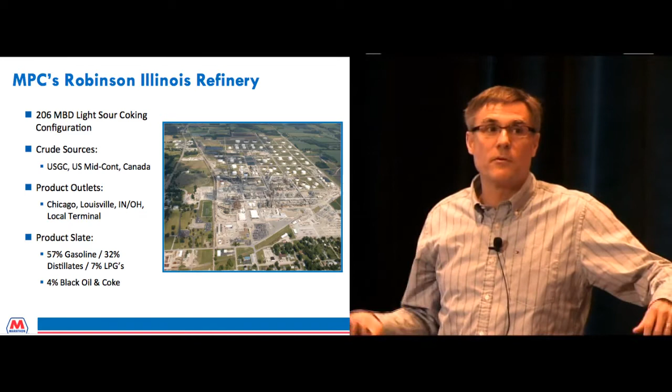And I guess one of the questions I always get is why is the refinery located in Robinson, Illinois? And I can tell you back in 1906 through 1908, it was the world's largest oil producing area. And that's why the refinery's there. So the refinery is 107 years old.

So we have a very strong commitment to safety at the Robinson refinery, and everybody has the right and responsibility to go home uninjured. We've been a VPP star facility since May of 1999, and 7 of our embedded contractors have VPP status. We also have an outstanding behavioral-based safety program that is all employee-led, and we are certified by the Cambridge Center for Behavioral Studies. So again, a very, very long record of good safety and environmental performance.

So then we go to our basis for action. We did experience a toxic gas exposure in early 2007. It was while a lone operator was neutralizing sulfidic caustic and was overcome by hydrogen sulfide gas. And I can tell you, I transferred to the refinery a couple months after this incident, and it had a significant impact on all the employees that work there.

At the time, the division manager that was there was very forward-thinking. His name was John Swearingen. Today, he's vice president of safety, environmental, health, and security for Marathon Petroleum. But he really wanted to come up with a man-down system after this incident, and really wanted to help those that were unable to help themselves. Obviously, in any type of toxic gas exposure or any other exposure, time is of the essence in getting help to an individual. And so we embarked on this process to address these points.

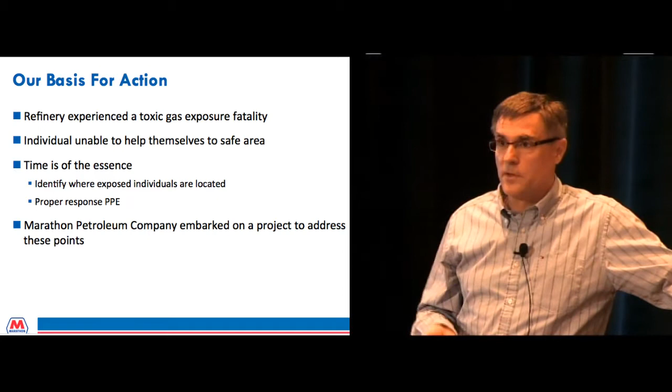At the time, the operations manager at the refinery was Kevin Bogart. And he went into a role over the 6-plant system, where he really led strategic projects. And so he, along with John, we ended up partnering with Accenture as a system integrator for this life safety solution. And we worked with them closely to really develop the solution that I'm going to talk about here.

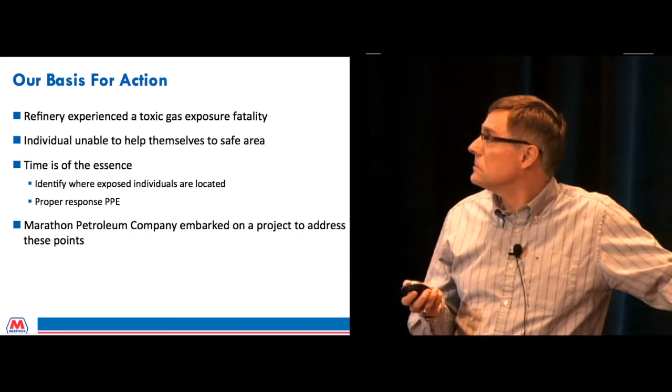So if you look at gas detection history, before we went to the life safety solution, everybody wore a single gas H2S monitor. Again, very common in the refining industry. And gas bumping and calibration, we required that on a monthly basis, so not very frequent. And there's no way to reconcile the data to a monitor, so it was difficult to understand who had that monitor, and it really relied on self-reporting of exposure incidents.

Now I will tell you, as we implemented the life safety solution, you would expect the number of exposures to go way up. They did go up, but not as significantly as we thought. So I don't think we were under-reporting as much as we thought, which is a good thing.

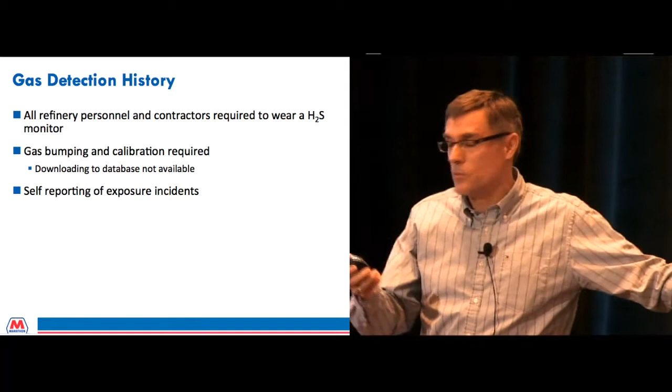So then, to close the gaps we wanted automatic bump testing and calibration of the monitors. We wanted to understand who is associated with each monitor. We did want, again, 100% reporting. And we wanted real-time data into a central control room operator that could help provide response. And they wanted the location of the personnel to be known.

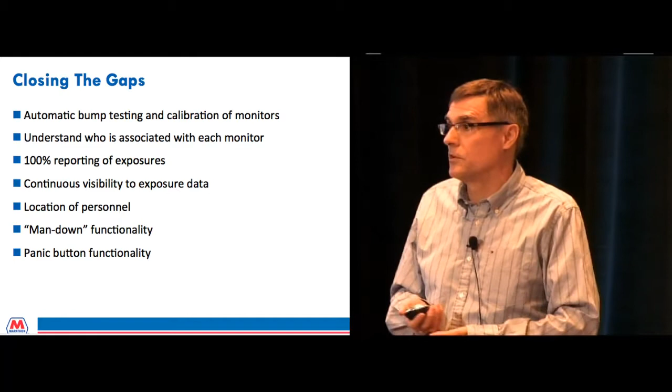And then obviously a man-down functionality. So if somebody went down with a heart attack, it might not be a toxic gas exposure, we wanted to get those individuals help. And then a panic button functionality if somebody was in a difficult situation. Again, those are the gaps we wanted to close. So then we came up with the life safety solution.

So in deploying this, again, I mentioned we're the first to install the life safety solution, and it is across all our process units and tank farm facilities, and it also includes coverage for a remote facility where we obtain our process water near the Wabash River. And so what is it? So what we did is we installed the Wi-Fi coverage across the refinery.

It isn't a mesh network, so some of the APs are just powered, some are powered and connected to a switch. And I will say the important thing to understand here is coverage-based, okay? It is location, so it's location-based. And then the other thing that's important too is there's no dead zones in it, right? So really important to understand that. So again, let me go back and add. I just want to make sure I'm clear on this. It is location-based, so again, it gives location of the individual versus just installing access points throughout a unit that just gives you Wi-Fi coverage.

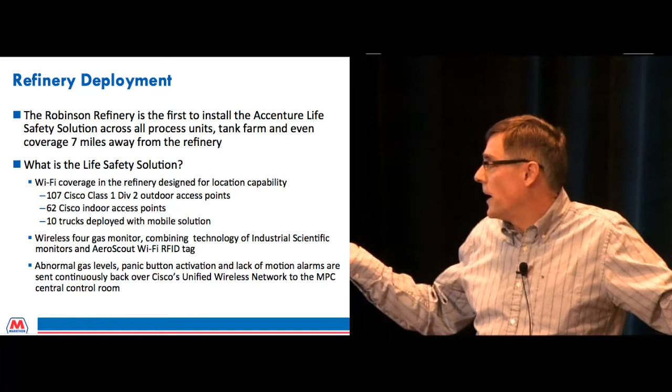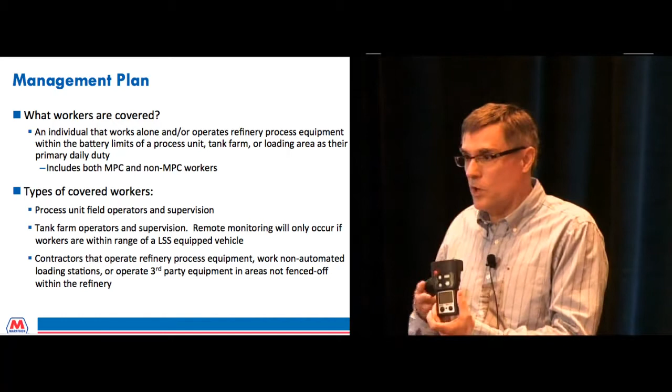So we had to define what workers are covered. Right now we cover all the operating employees, and we came up with that just because they're lone workers. They work alone, so they'll be out making an operator round alone. As of today we have not covered maintenance, and the reason is they tend to work in pairs, so they don't work alone. And roughly 240 operators are covered with the system at the Robinson Refinery. And what's really nice about it is we can pool these devices. So we didn't have to buy 240 of these. We ended up pooling them, and so there's some economics that we benefited from there.

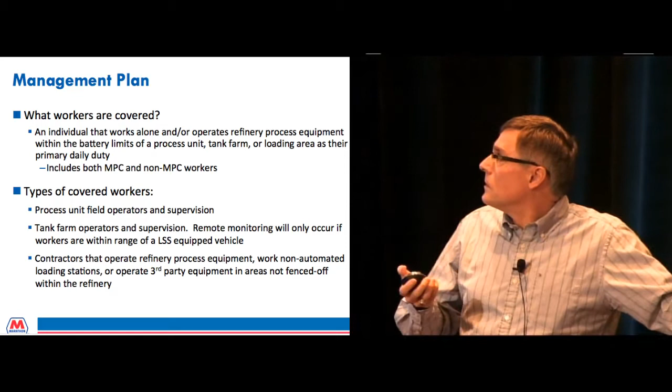So the work processes are really pretty simple. We have a pool of monitors in each operating shelter. At the refinery, there's 7 operating complexes plus the tank farm, so 8. And so we have a pool of monitors in each operator shelter. And so what happens is the night shift comes in. They'll take the day shift monitors that were just released. They'll put them in the docking stations, calibrate, bump test them, put them in the charger, and then the day shift will pick the ones that the night shift had done the same to and charge. So it works really well for us.

But the key thing that I really like here is there was a lot of debate about where this real-time data should go. And there were some proponents. Again, I want to make this really clear. This project was driven by the operations department. The operating organization at the refinery drove this. So safety didn't drive it, and IT didn't drive this. But we did have some input from them. Obviously, we needed support. But one of the things that came up, safety wanted to have our security group monitor these alarms coming in. Well, they have no clue. There's no training. They don't understand what the alarms mean. And so what we ended up doing is at each operator console, we have 7.

We have a central control room with 7 operating boards. And each operating board has a monitor where they're monitoring the people in their process unit. And the reason that's so good is those operators, the console operators, are trained in all the outside jobs, so they know all the hazards. They understand when somebody does get exposed, what tasks they were doing, and then also they understand what type of response to come back with.

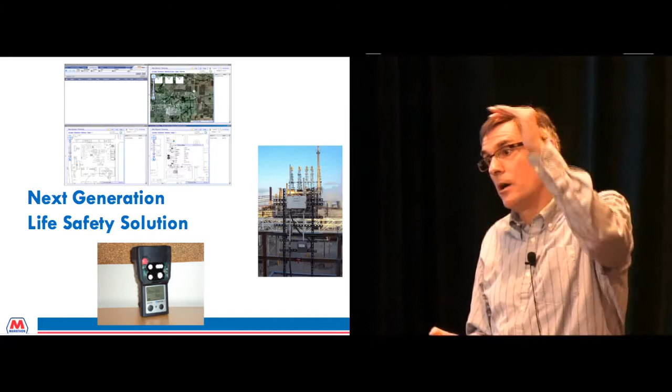So if I go back in the presentation here, to this screen up in the upper left-hand corner. That stays steady, it doesn't move, but that's really the alarms that come in there. And so what happens if there's an alarm on H2S, it comes in, it lets the operator know who the individual is that has the monitor, and then it also gives the current reading, so what gas level, so they can see, is the gas level going up, is it going down, or more than one operator exposed, that type of thing. And again, what's nice here is the operators help design this.

So the console operators actually help design how this looks. They do have to silence the alarm here, and so they can silence the alarm when it comes in, but it doesn't automatically roll off like the DCS alarms do. It stays there, and so then they have to make the proper response out in the field, and then after everything's clear, they can clear that alarm on there.

What's really nice, though, is the plot areas. They have some ability to move those plots around so they can look at one process unit if there's a lot of maintenance or a lot of activity going on in there, such as a turnaround, or they can expand it and they could look at their entire complex that might have 3 or 4 process units in it. So they give some variability for the operator what they want to look at.

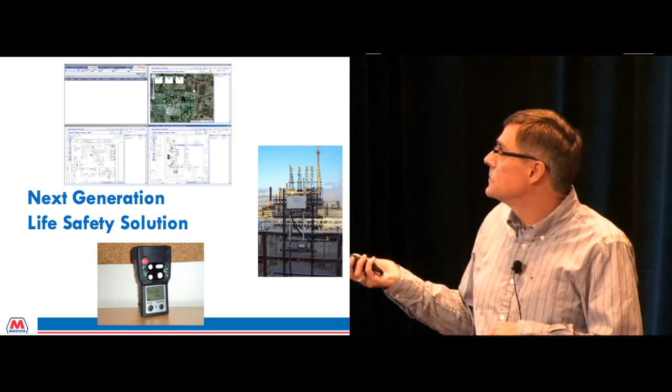And at any time they can click on one of these characters here, who's really the individual in the unit, and they see the real-time data that's coming in on that individual. So again, data is transmitted every 5 seconds. Okay.

So the other thing that's really nice about this too is to ensure this 100% reporting. So the alarm comes into the central control room operator, but also the system generates an email. The email ends up going to the chief operator who's on shift. It goes to the day foreman who also gets that. And then the chief operator on shift is responsible for entering that in our knowledge management system. And that's where we track all our incidents, HAZOP recommendations, so it's just a large database.

And then I come into work the next business day, and I automatically know if there's been any exposures. And then I can make sure that we get the proper investigation. So usually, if it's an exposure over 10 ppm, and that's our action level, we'll do a Category 1 incident, we'll have the day foreman investigate it, and if it's over 50 ppm, then we'll put a TapRooT incident investigation team together. So just to give you a feel how we handle those.

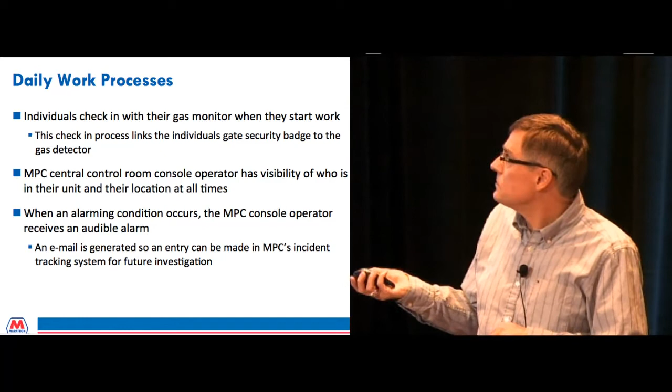H2S alarms alarm instantly, so there's no delay in coming in, and so we get those right away. But on the LEL, it is set for 10%, and it does have a 15-second delay. Because what we noticed is there were times when they were disconnecting a sample bomb, it would alarm for 3 seconds, and there were nuisance alarms coming into the console operator. So we put that 15-second delay in there to say, hey, is it really a significant event? And so if the LEL falls back, then there's no alarm generated to the console. And the same goes for the O2 alarms. They're handled the same as the LEL.

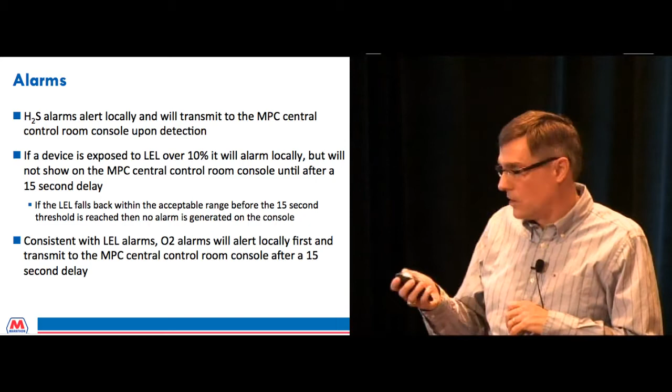And then one of the things that we're still working through, I did mention it's a 4-gas monitor. We do have a CO boiler at the refinery, and so we would like the functionality of CO, but right now there's hydrogen interference issues. It's an issue that Industrial Scientific is working through. And this is also big for them, I understand, in the steel industry, so for blast furnaces and things, they have to resolve this.

And then for the motion aspects, what we do is lack of motion. We set it 2 minutes, and so if somebody doesn't move for 2 minutes, then it'll alarm, and they have 30 seconds to acknowledge that. We had it set for a much shorter time period, and we found that that wasn't a good thing.

We were generating a lot of alarms. So we wanted to balance if somebody really went down and needed help versus a lot of nuisance alarms. And we ended up on this 2 minutes, and it's worked very well for us. And so then they have 30 seconds to locally acknowledge it by shaking the monitor. And if they do that, then it clears and it won't go into the central control room.

And the comfort stations, one of the other things we came across is it's wintertime, they put it on their jacket, they go in the comfort station, they hang up their jacket, and the next thing you know, it's alarming. So we put exciters in at the entry points into the blast buildings, and so when the operators go in their blast buildings or operator shelters, it turns off the motion and then turns it back on when they go out. But all the other readings are still active. And again, the panic button transmits immediately into the central control room.

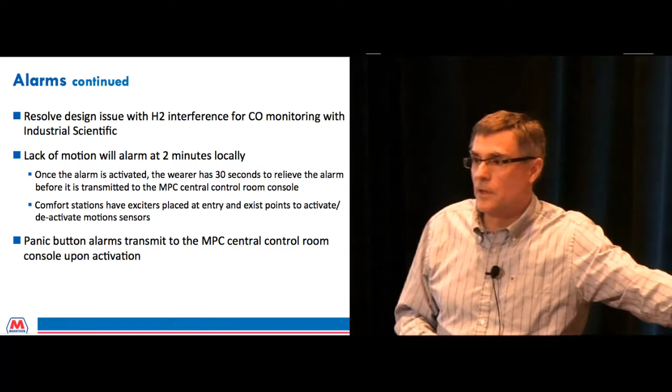So for emergency response, the key thing I mentioned earlier, all the console operators are qualified in all the jobs outside. They understand the equipment. And so they make radio contact, confirm that the individual's okay, and if necessary, then we'll respond with the other operators on shift with fresh air or as needed, depending on the alarm. And the key thing is you got that continuous feed of data.

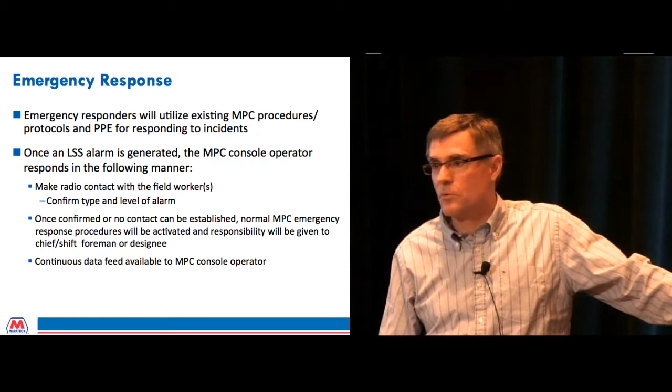So what are some of the intangible benefits? Some of these we just didn't realize going in that they would be there. The first one is the alarms are reported on detection, so we don't have to reconcile monitor status reports. I sometimes peruse our sister refineries in the knowledge management system just to see what they're doing, and I'll come across where they found a week ago, here's 6 or 7 monitors that alarmed, and they're trying to reconcile it, and people are off shift, and they have a difficult time doing that. So we don't have that.

And then the other thing is we do store the location of the event and the exposure. So if we do need to go back from an industrial hygiene standpoint, we can. And then again, we have it in our knowledge management system, so we can follow up on these with engineering controls or behavioral modifications, those type of things.

The other thing that we found is the console operators really like it because they understand where their field operators are at all times. So if they need an adjustment to a fired heater, a burner installed, or a pump put online, they just watch where the field operator is, and if they're close, they wait till they get over to that location and then make that request versus running the field operator all around the unit. So that's very nice.

It is interesting, though, I'll come in the plant on a Saturday or Sunday morning, and I can tell everybody's in the blast building. That's sort of an interesting thing I've noticed.

But I think the other key thing here is when we first implemented this, we were doing a pilot in our Penex unit, and we had a PSE event where we had a dead leg off a water boot, and it started leaking, and then it hit the hydrocarbon layer, and we had a release.